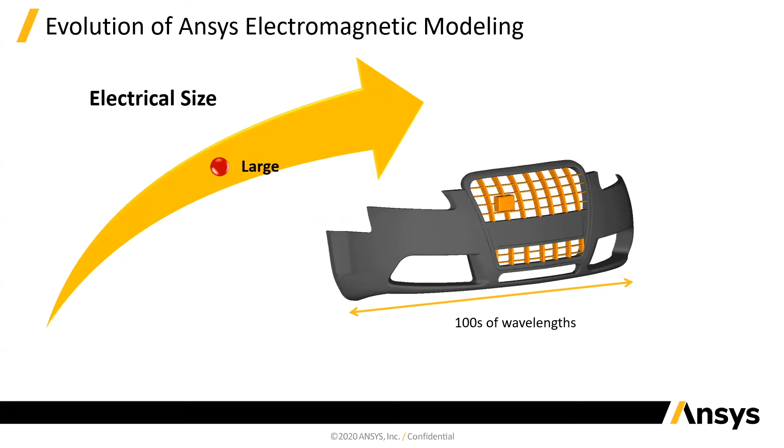But where we are today is in the very large electrical size, which is really what we're looking at here on the screen, which could be an entire street scene with buildings and trees, other vehicles, right? So electromagnetic simulation has evolved from the very small to the very large, right?

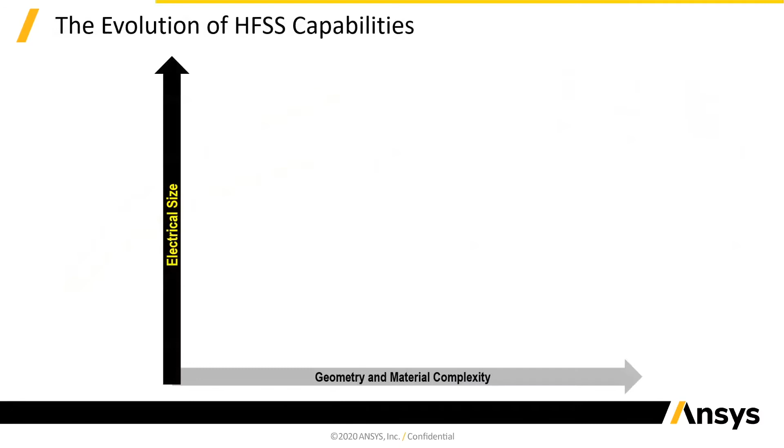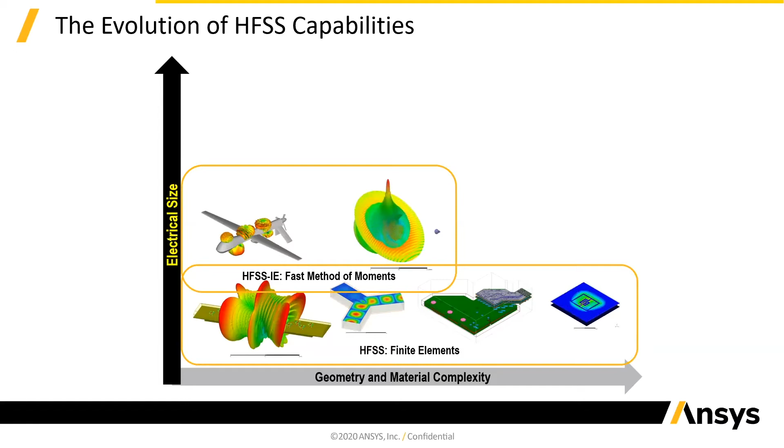And that is shown on this slide here as well, where you can see that HFSS, which is our premier 3D electromagnetic field solver, in the early days was used to model things like that waveguide or possibly that inductor on the right, but everything was reasonably small, right? But of course, over time, we have better mathematics, better computational hardware, so we can start doing electromagnetic analysis on small aircraft, things like that.

And then now, of course, most recently, we can do an electromagnetic analysis on entire battleships, entire toll collecting structures that include cars and trucks and all the information that is passed between them, as well as very, very small antennas onto very, very large structures like cell phone towers or military aircraft that have very small radar antennas or communication antennas.

So we are no longer at a place now where we can only model very small things. We can actually model very, very large things. And when I say model, we can give a very good electromagnetic description of what happens when you have these large structures, and you need to know what happens to them electromagnetically.

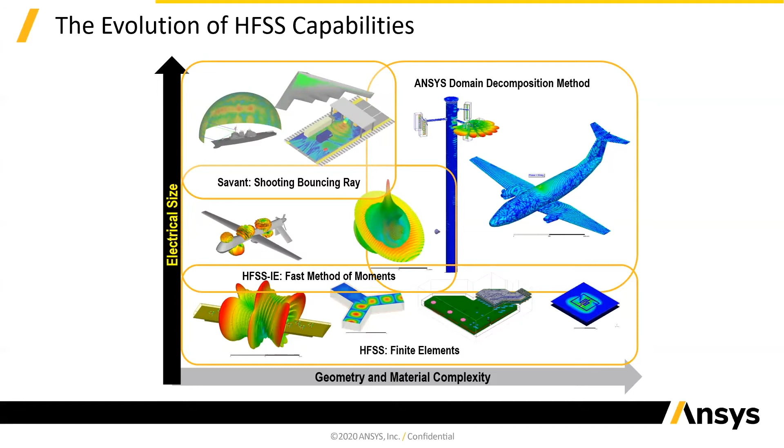So put that information a slightly different way. On the left-hand side, you can sort of see our single component simulations. This is what we used to do back in the day, right? We have very basic waveguide components, very basic connector types or single antennas.

And then of course, as we become better at simulating, as we get better hardware, and as the software matures, we now can simulate things like packages merged onto printed circuit boards. We can merge human bodies into simulations of MRI machines, and we can merge multiple single antennas onto an antenna platform or an array, complete with matching networks, attenuators, phase shifters, power dividers, what have you.

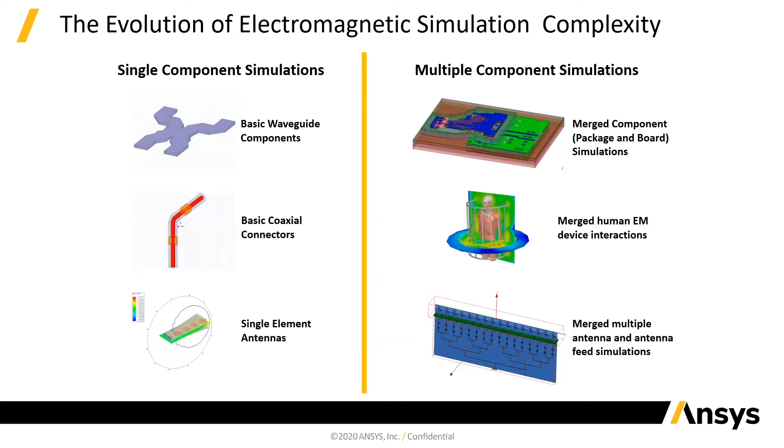thereby creating these hybrid electromagnetic circuit simulations, where we can take a very complex structure like the filter that's shown on the left here, this 8-pole filter. We can break it down into pieces, do the electromagnetic analysis of the individual pieces, and then recombine them all together.

And of course, what this allows us to do is rapidly tune things, because now we have smaller models, and it uses less resources because smaller models tend to solve faster. So we can make a bunch of smaller models that will then represent the larger structure.

Now, the other thing that we started doing is mixing and matching electromagnetic simulations, not just with simple S parameter concatenation, which is what we're doing on the left, but something a little bit more complicated, where we actually have real signals that are being driven into an electromagnetic simulation, so to speak.

So on the right-hand side, if you look very carefully, it appears to be an RFID system, where we have a package and a conveyor belt at some distance from a wall where a sensor is mounted, and that is the electromagnetic simulation. However, we also have the corresponding circuitry for the transponder and the tag circuitry, and we create an overall simulation of that entire system, right?

That entire RFID system, where we now not only take into account the electromagnetic behavior, but also how the system behaves under very specific electronic excitations. So this is sort of where we were in about 2016, 2017 or so. Now, when we move up into 2019, we've pretty much gotten our tools to the point where we can do what I would call some very interesting real-time analysis.

What we're looking at here is a simulation of a car driving on a road. Now, this is a full-size car. It has an actual radar module in the front of it. You can see that in the screen right here in the middle. To the left of that screen, what you are looking at is a Doppler range plot, which is created by our tool, right? So we do an electromagnetic simulation of the interaction of the radar system and the car that it is attached to, as well as other cars.

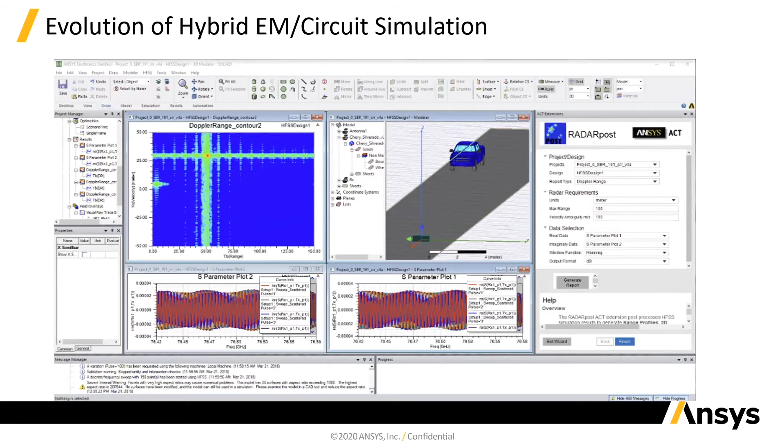And then we can take those electromagnetic results and post-process them using our radar post-processing feature that's in the tool, and get these radar range plots, so that we can get something that basically looks like what we're looking at here on the screen, which is a traffic scene that has multiple cars. We have traffic lights and street lights, and this is a dynamic model. And on the left-hand side, we can see all the radar images of all of the trucks and the cars, as well as some of the radar images from the various street lights, etc.

So this is really what I call a very large-scale electromagnetic circuit and system hybrid simulation, right? This now requires an electromagnetic simulation. However, we post-process data, just like a radar would shoot out. We post-process it to create these plots.

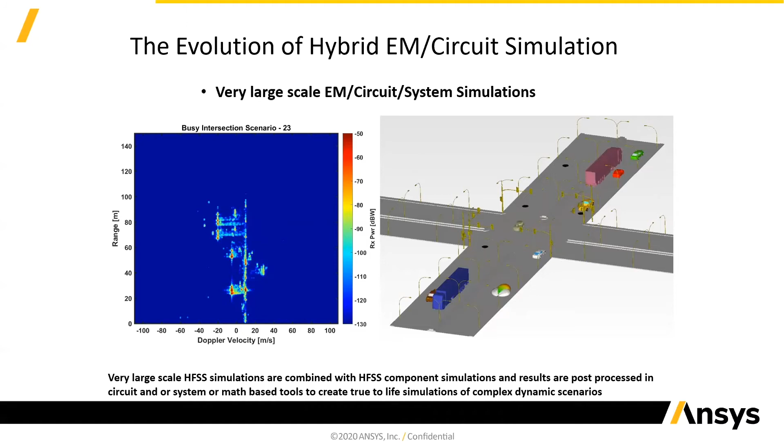So at the heart of all of our simulations, whether they are small or these very large simulations, sits a tool called HFSS. It's one of our premier electromagnetic solvers, and it is a tool that has been proven to be highly accurate. Thereby, we are very confident when we use this tool in these very large simulations that the results are highly accurate.

The reason why HFSS has this very good reputation for accuracy has to do with automatic meshing. I'm not going to go through the automatic meshing. However, I will say that we are one of the only companies in the world that does this very well, and it is the reason why we have the reputation that we do. If you have questions about the adaptive meshing, please ask me at the end, because this is a whole topic on itself. However, please be aware that the key to HFSS is accuracy. And the reason why people who use our tools have an enormous amount of faith is because of this automated meshing.

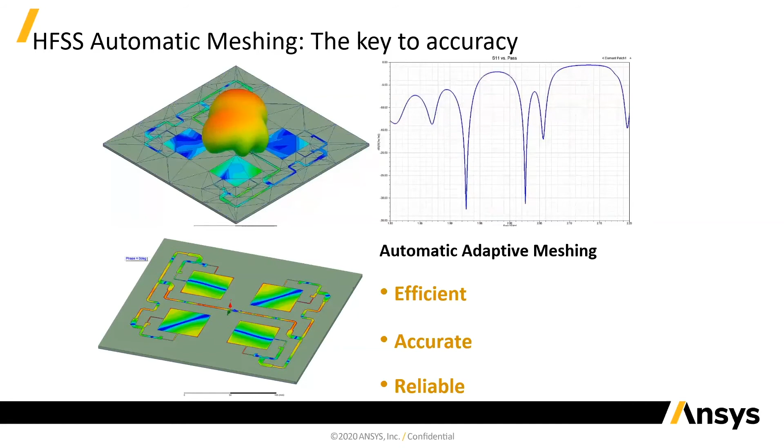But now that we've talked a little bit about what the scope is and what my definitions are, let me show you how we would use our tools to do some of this work. So the first example I'm going to use is using Ansys tools for ADAS design. ADAS is automated driving and assist. The example I'm going to use here is a very simple 77 gigahertz radar array. This radar array is designed using HFSS, and you can see on the right-hand side it has both transmit antennas as well as receive antennas.

Now, the thing on the left where it says power divider in the light blue, that is our circuit tool. What I've done is I've hybridized together an HFSS simulation, that's the square box you see in the orange, and combined it with a circuit power divider, right? So now we have a hybrid simulation. The reason we're doing this is because radar antennas are steerable. How do we steer them? Well, we can steer them by changing the phase of the individual antenna excitations. So I've done all this in Ansys HFSS.

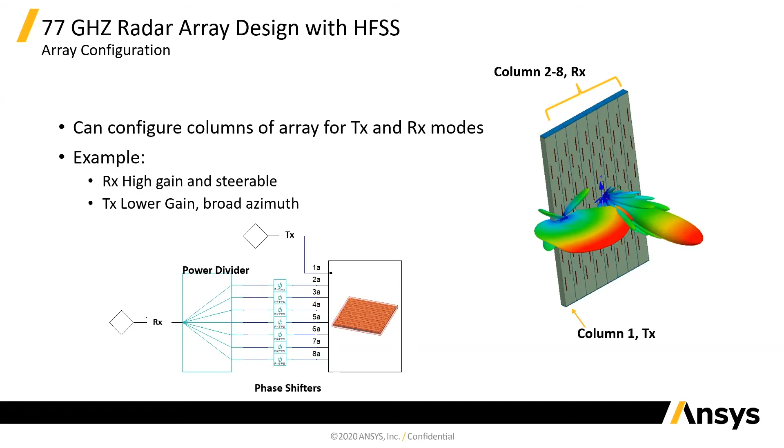Now I've designed my antenna. I've created an antenna that is steerable. The next thing I want to do is integrate it into the front end of a car, and this is exactly what we're looking at here. So I've taken my antenna, which is a very small antenna, maybe 10 centimeters by 10 centimeters, and I'm going to mount that in the front fascia of this car. And HFSS, of course, has a number of different tools within it, the circuit tool being one of them, the finite element solver being another one.

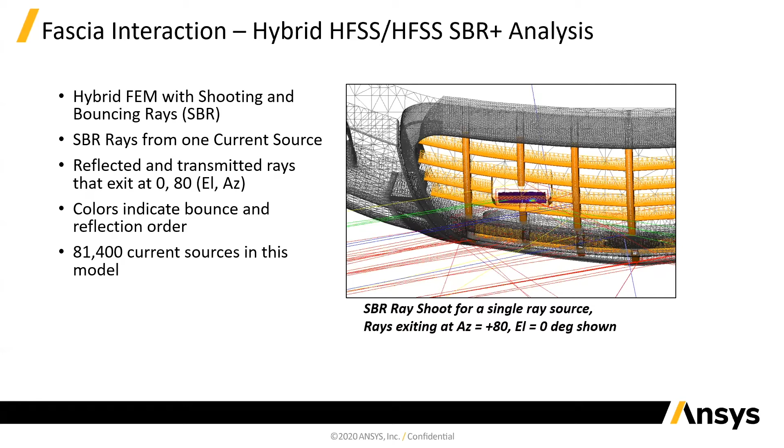And then we also have what we call our SBR solver, which I am now hybridizing into the simulation as well, so that I can do things like we're looking at here, where I have my fascia of the car, I've integrated my radar antenna onto it, and I can now do a very simple simulation of what does my antenna pattern, or what is the effective performance of my radar when it is sitting behind a fascia and when it is not sitting behind a fascia.

And these are the first things that we need to figure out, right? If we put the antenna where it's supposed to go, how well does it work? So this is a very nice way for us to do this, right? But this is strictly an electromagnetic simulation, right? We're just simply saying that this antenna will work a particular way when we install it where it is.

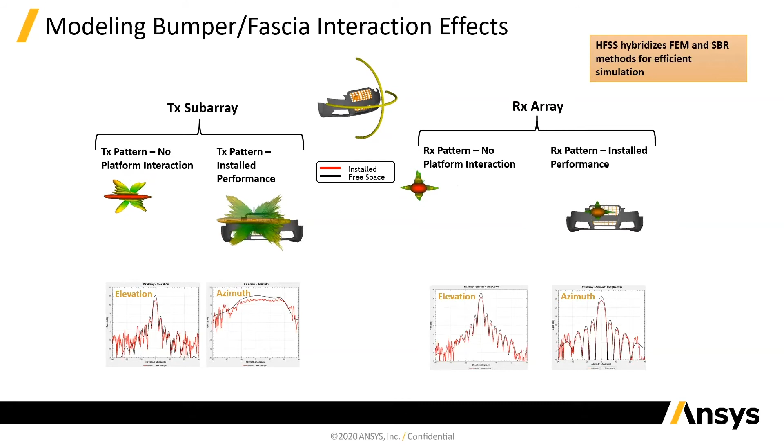So the next thing we want to do is we want to figure out how well these antennas communicate with other antennas, right? For instance, or how well they pick up the radar signal. And we can do that as well here by just looking at a simulation where we have two cars communicating with each other. And you can see in the one instance on the left, the truck always stays in the left lane, whereas the instance on the right, the truck comes into the right lane,

and we can see very clear in the results below that at some point the truck is going to impact what we call antenna to antenna coupling, but that is really rather just a measurement of how well these two antennas communicate with each other. And obviously when the truck goes between the two antennas, communication is going to suffer. Now, this is a dynamic simulation that we can do in our tools without any problem.

But of course, we can take it to the next level, like I said, where we can talk about radar and how well a radar antenna will work. And we do that also in our post-processing in HFSS. And we've made the post-processing for that quite straightforward.

Users simply have to specify the center frequency that they're interested in, the range accuracy, the range maximum, velocity accuracy, and velocity window. And users can turn these knobs, and then we can tell you how well your radar antenna is going to perform when we have these different variables.

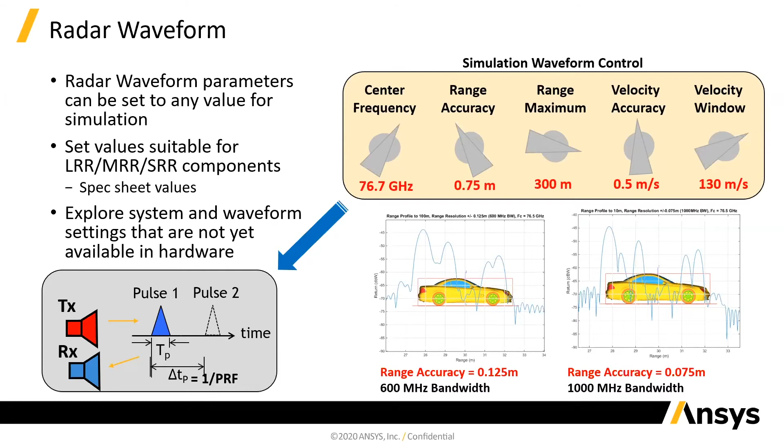And what we're really looking for is how well does our radar work in this kind of a situation, paying special attention to the fact that if you're in the ego vehicle, which is the vehicle behind the semi-truck, and we've all experienced this, we cannot see around the truck, so we do not know whether there is a vehicle in front of that semi-trailer or not. And then, of course, the question becomes one of, well, can our radar see it?

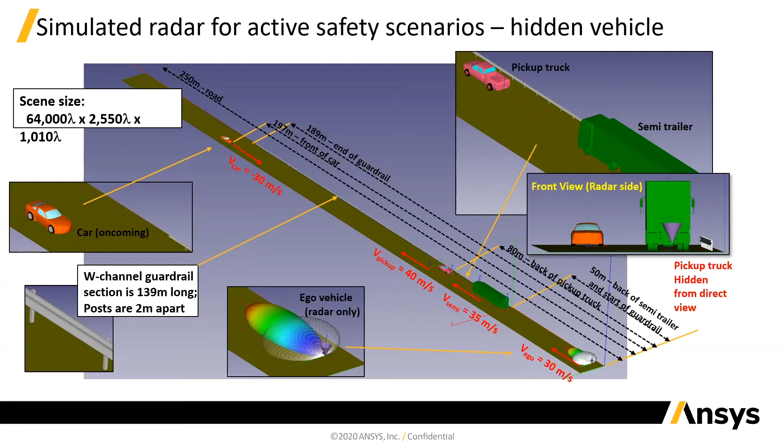And when we go through the simulation, we do our electromagnetic simulation of this scene, incorporating all of the cars in the roadway and the guardrail, we can see quite well on our range plot the radar echo for the semi-trailer, but we can also see the radar echo for the pickup that's in front of that semi-trailer, as well as we pick up the guardrail that's on the right-hand side of the road, right?

So when we do these types of simulations, we represent reality, and we can very quickly and very easily see how discerning our radar is for potential obstructions and things like that. So what this allows our customers to do is it allows them to virtually test the performance of their radars for worst case scenarios, for corner cases, really for anything that might be hard to test or expensive to test.

Certainly, you can test your software of your radar to make sure that it can pick up things that we know should be there or are there because they're part of the simulation. So it's a way for people to get a very clear understanding of how their radar is going to work.

So that is one of our sort of key simulation types that we're doing because there's a huge amount of interest in ADAS. Now, the other example that I'd like to show you how we use our tools is really our 5G communication system design. So everybody's familiar with 5G.

So this was very much a state-of-the-art simulation where we included all of the necessary requirements to have a real live representation of a wireless communication system. So we settled on 802.11g, and we configured our simulation, and you'll see what I mean by that in a moment, to basically be an 802.11 Wi-Fi communication system that had exactly the type of modulation and encoding as well as error correcting at the receiver side that you would have in real life.

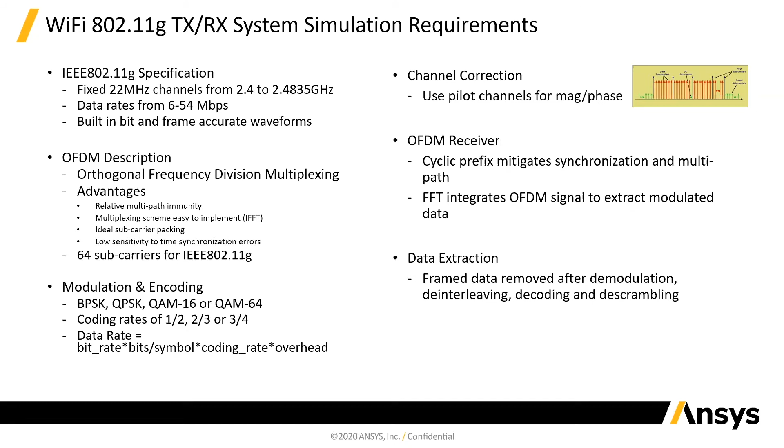And what this looks like in our tools is like this, right? On the left-hand side. So we have a transmitter block and we have a receiver block. And in our tool, I can create a Wi-Fi system using functional behavioral blocks that are in our library, and basically recreate all of the main stages of a Wi-Fi transmitter and a Wi-Fi receiver, right?

Now, between the transmitter and the receiver, traditionally, people have some sort of element, right? Because there's a path that the signal has to go. So traditionally what people have is what they call a complex additive white noise element. And what that then does, it gives a little bit of reality to this system, right? It gives a little bit of, hey, something is happening to the signal between the transmitter and the receiver. So let's mock that up.

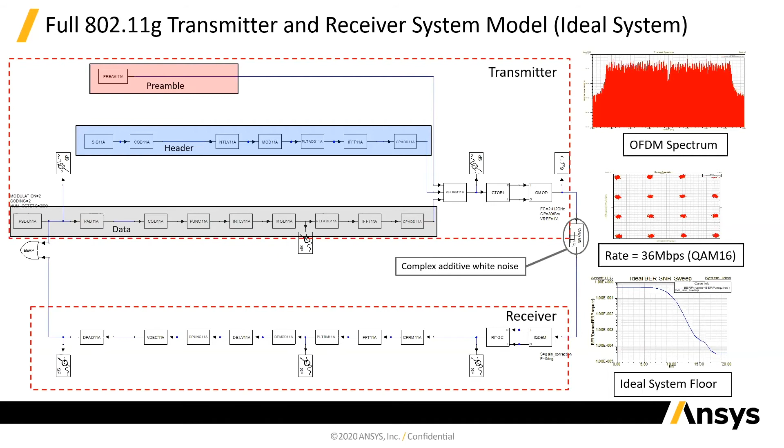Right. But of course, the problem with complex additive white noise is that it's just made up. It has no reality, it has no basis in the actual physical thing that you're trying to simulate. But we can use it to look at our orthogonal frequency division multiplex spectrum. We can look at our constellation plot, which is a QAM16 constellation plot. We can look at the system noise floor. So we can use this information to give us some sense about how our system should work in an ideal case. But of course, here again are our ideal results.

But what happens when we now, instead of having an idealized antenna and an idealized path between transmitter and receiver, let's put in some realistic pieces and parts. So here we have a PIFA antenna. It operates at 2.44 gigahertz, and this antenna gets analyzed with HFSS, our electromagnetic solver.

And once we determine that the performance of the antenna on its own is good, we can then take the antenna and we can place it into a wireless printer, this one being courtesy of HP. And what we can then do is we can determine how well this antenna will work when it's inside the printer. And this is already very good information, but we can do more.

But here, what we can see is that ideally what we would like to have for installed antenna results is these very smooth, sort of apple-shaped, what we call antenna patterns. Obviously, we can see on the screen here that the antenna pattern is not apple-shaped. And that's just what happens when you put antennas in structures that aren't meant to hold antennas. We all deal with this pretty much every day if you're an antenna engineer.

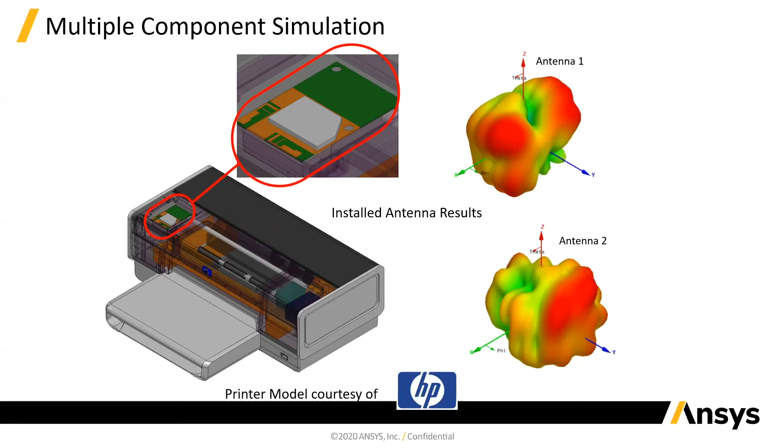But now, because we know the performance of the antenna has been compromised, we really need to figure out, well, does this thing still actually work, right? Can it still communicate with the router? And this is why I ended up making this simulation here, where we now have sort of a typical office environment where we have a router, we have a wireless printer, we have some file cabinets, right?

And now the question really is, well, I don't have line of sight between my router and printer, so will this system actually work? And if I only used additive Gaussian white noise, I'd never be able to figure that out, right? So what we could do is we can replace our additive Gaussian white noise with an actual electromagnetic model of the environment where my high-speed wireless communication is taking place.

So my office, right? So all I've done is I've replaced the additive Gaussian white noise block with an HFSS simulation block. Everything else is the same, and now I can look at the same results as before. And what is most interesting to me is that we can look at our constellation plot, and the blue dots represent sort of my initial attempt of creating this system where I just had additive white Gaussian noise and things were fairly well behaved.

But once I put in an actual realistic environment, we can see that the constellation is really starting to drift, or it's being smeared around. Right? And this is a very clear indication that we're going to have a lot of dropped bits. Our signal to noise ratio has gone way down, and we're probably going to have a really, really poor bit error rate, right?

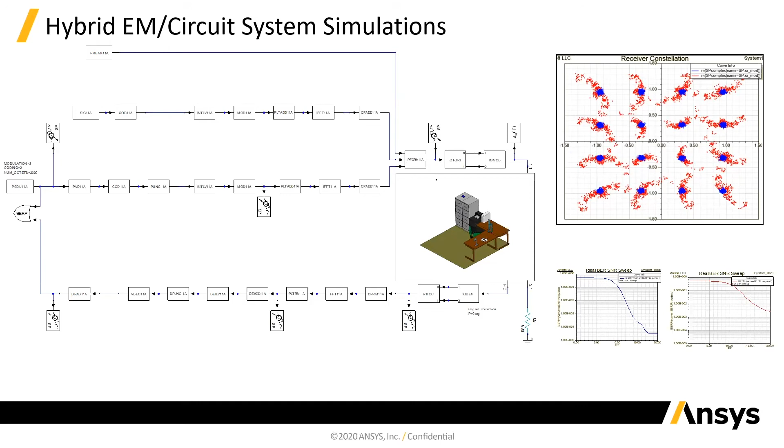And this is why we now enable our users to do these types of simulations, so that you can get some real life awareness of what happens. But remember also that I said that this was about 5 years ago, state of the art. So we've probably even made this situation better. And we have. And let me just talk about this as well real quick.

Now, when I create these simulations, not only do I get to have the circuit information that I want, like constellation plots and things like that, I can also look at the fields that are in my space. And by looking at my fields in this space, it becomes very clear that my printer is in a bad location with respect to my router. We can see that there's very little field linkage between the two. So simply by looking at the fields, I can already tell that we're in trouble, right? So this is another thing we can do.

So now we can look at the electromagnetic fields in our space, as well as our circuit type results, like bit error rate, noise ratios, things like that. But as I mentioned, this was like about 5 years ago. So what have we done in the last 5 years?

Well, if you guys are following what's going on with 5G, you will know that 5G is going to take over the world. So we can use the exact same methodology that I showed before to do 5G design, with the addition that we can make our spaces much larger. Right? Before, I was only able to simulate this one single office, and now what I'm simulating is an entire apartment, right? Where I have a living room, a kitchen, bathroom, bedroom.

And 5G antennas tend to be very, very directional. And if we look at this picture here, we have a very directional beam pointing directly at the device or the beacon. But we can model this now in a dynamic way where we introduce blockage. So if we have scene one, where we have no obstructions, no blockage, we can see that there's a very nicely shaped beam pointing directly at what we call our device or our beacon. And this, of course, indicates that we're going to have really good communication between those two devices.

But now if a person is going to walk between the array and the beacon, what you'll see if you look very carefully is that this main beam is totally blocked by this human, right? But the 5G transmit network is smart enough to realize that there's blockage there, and a second beam, you can see it just off on the right hand side.

This second beam gets a little bit bigger. Right on the left, it's small, gets bigger on the right hand side, and it's shooting not directly at the device, but it's actually shooting at the wall. And then it's going to use basically the wall as a reflector and reflect that signal to the device, right? This is how 5G works.

5G systems employ a lot of MIMO, and they employ a lot of antenna arrays. And what they do is to have these dynamically steerable antennas. And we help people simulate those devices with those steerable antennas, right? So now a user of our software can go in and they can create any number of worst case scenarios or dynamic scenarios, and they can then see how well their antenna is going to work and how well their antenna will compensate for things like blockages.

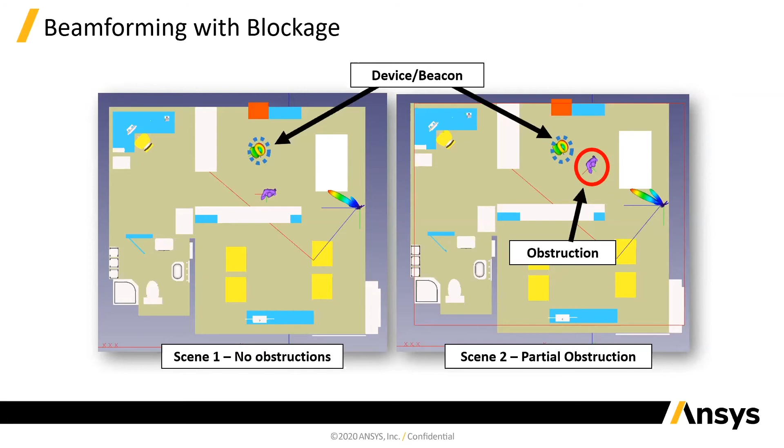So for instance, there's a beamforming algorithm that's called a zero forcing beamformer. And what that does, it dynamically steers the null of an antenna pattern in the direction of interference, right? So if you have an interferer and you don't want to waste any signal speaking with that interferer or projecting any signal towards that interferer, we want to have a null in that direction.

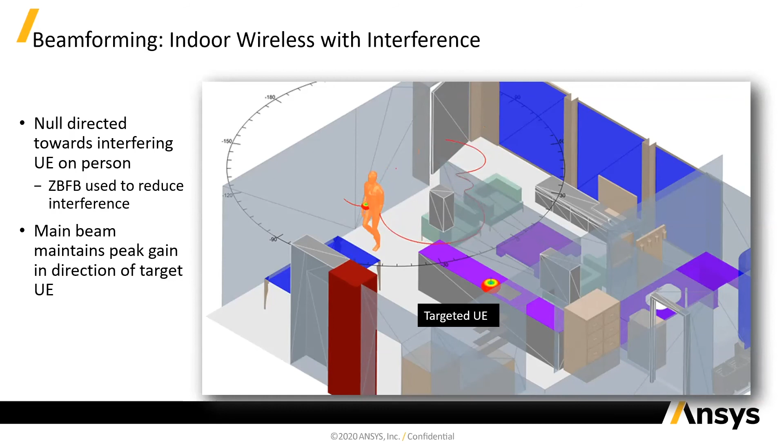And now, right, we are not just simulating two antennas, but we are simulating two antennas in an urban environment. And we're going to do this so that we can evaluate antenna array performance, we can do site evaluation, we can do our beamforming, our null steering, and we can describe how much antenna power is used, etc.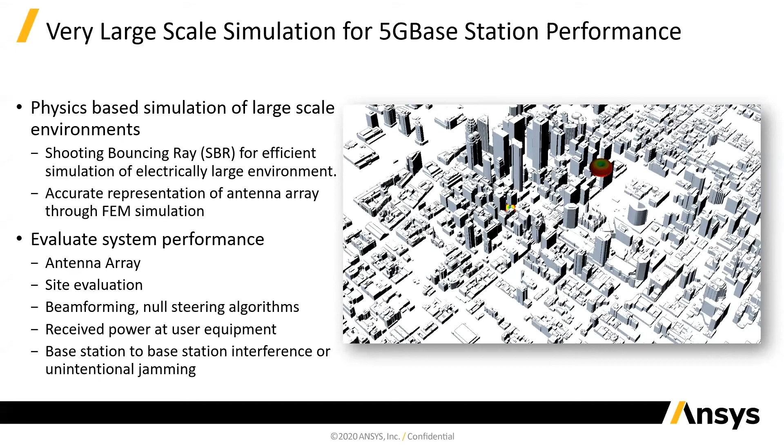So to give a little bit more insight into this simulation here, what we have is our base station, which is not moving, and our car that is moving. And if you look at the antenna pattern of the non-moving antenna, you can see that it is always pointing at the round sort of globe that is moving down the roadway, right? So this is dynamic beam steering. Right. So in order to stay in maximum contact, we need to steer that beam dynamically towards our source.

And of course, this requires electromagnetic simulations as well as circuit simulation, as well as beamforming algorithms. And we can combine all of these things in our simulations. And we're talking about a very, very large volume here, right? We're talking about something that is 1 kilometer wide and 2 kilometers long. So it is a large, large system.

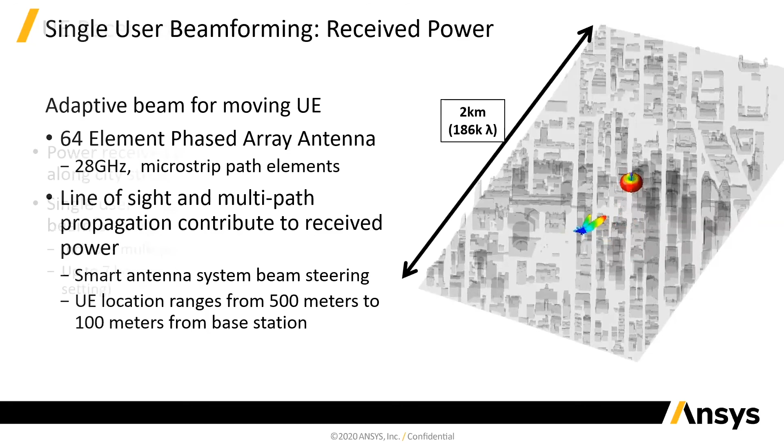And basically when we talk about received power, this is what we're looking at, right? The received power is all over the place because of all of the obstructions and all of the multipath and all of the reflections that are encountered by the electromagnetic wave traveling from our transmitter to receiver, right? But this information is what is needed by people who want to make wireless communication systems.

Now, in this particular case, we are using our SBR tool in combination with our HFSS tool. Our SBR tool is the tool that allows us to do these very, very large simulations, right? And because we can combine circuit and electromagnetic field solvers and beamforming algorithms, we can also look at things like base station handoff. We can see when does the power drop below a certain level, and it has to be handed off to another base station.

Right, so we can see that right here. We have a dense urban environment. Our car is moving. There's our base station. And then we have a second base station over there. And what this allows us to very clearly show is that right here, where the blue and the red curves overlap, is where handoff is going to have to occur, right?

Base station 2, the blue curve, we're good, right? We're far away from base station 1. But at some point, the signal that is received by the handheld device is going to be equal from base station 1 and base station 2. And that's when we hand it off. And then right here, we're no longer going to be using base station 2 to communicate. We'll actually have been handed off to base station 1.

And this is the type of information that, again, people need to know to do your worst case analysis, your corner case analysis, etc. So in the end, when we talk about what is the state of the art, it is really being able to simulate extremely large environments, right?

Not just the connector or a waveguide, but extremely large environments, airplanes, cityscapes, and using those electromagnetic simulations in, in this case here, an end-to-end system example where we have our baseband transmitters, our RF transmitters, we have our receivers, and these are all electrical simulations. These are all electrical circuit simulations.

And the most important part between the transmitter and the receiver is the channel, which could be an office, it could be outer space, it could be a moon base, a moon station, right? It could be really anything where wireless signals have to go. That channel can be modeled from an electromagnetic perspective and include all of the electromagnetic behaviors that occur in nature: multipath, reflection, refraction, absorption. All of these effects are included in the electromagnetic characterization of your channel.

So now you can get an actual virtual representation of the environment where you're going to have wireless communication, right? And we can make that as big or as small as we want. So when we talk about state of the art of electromagnetic simulation, what we're really talking about is taking electromagnetic simulation and putting it at the heart of our overall larger simulation, whether it's wireless communication or radar or really any other type of electromagnetic based component system,

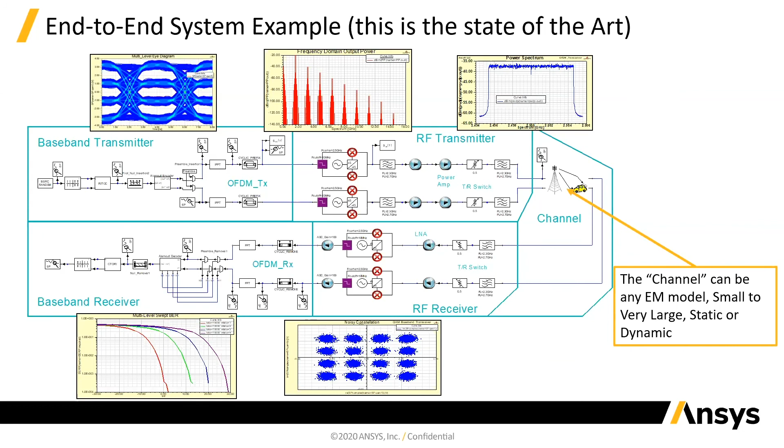So this is pretty much it for me. If you guys have any questions at all, I know it's a lot of material and I went through it pretty fast, but I hope you guys have some questions.

Thank you. Thank you so much, Markus. That was a lot of interesting information. I myself am amazed at what Ansys can do for everybody who's dealing with either electrical or electromagnetic applications. So that was really informative.

Thank you so much. Markus, when you talk about these extremely large environment simulations, the state of the art, wherein you're not just simulating large scale facilities but also incorporating different systems, how does the simulation time or the computational resources required for such a simulation compare with small scale simulations? For example, how would the office room that you simulated compare to a simulation like the one you showed in the city where you have a lot of buildings?

Sure. Would that be eased by the use of tools such as SBR or something of that sort? Yeah, that's a great question. And the answer to that question is, when I did the office originally in 2015, I was limited in how large a model HFSS could solve. There is a finite limit to everything when we're talking about HFSS and finite element solvers. So doing something like a cityscape would be impossible.